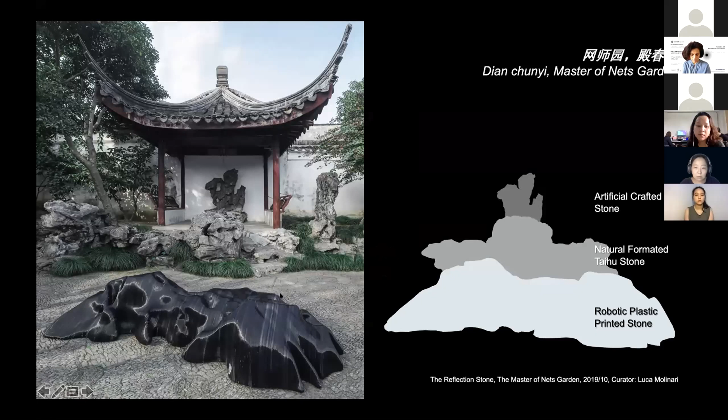I want to put forward several examples in about 2 minutes about what we have done in the past 2 years. This is the Chinese Garden new contemporary art. We position the new 3D plastic printing rockery in front of the natural format and the Taihu stone in the middle.

And an artificial craft stone from 100 years ago. So it's like a collage of different history and tradition scenarios, which presents new technology and also addresses itself into the tradition. So that is like a background.

I want to start the rethinking on humanism in the Anthropocene. And this is like a new human behavior—we can play with this kind of new rockery as street furniture, which engages into the visiting process.

In the last few years, we researched different pavilions focused on a bridge—every year we make a bridge. This is a 3D plastic printing bridge. The first year it was around 1,500 kilo, and we could stand like 5 people on this.

This is the second year. We invited 2 former chairs of MIT and the Pritzker Prize winner Wang Shu to come here with us for the opening of the pavilion. This is a 3D concrete welding, steel welding bridge.

It can stand like 7 people on it, and the weight of the bridge is around 800 kilo. So that is a higher performance compared to the past one.

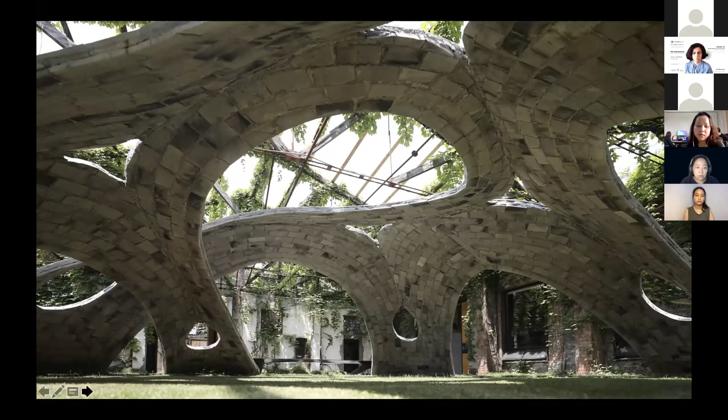Afterwards, this is Philippe Block and me standing on it, which has a very high structural performance. Based on this kind of formation, optimization, and fabrication process, we are embracing the tradition like a vault structure toward a bright future—it's structural performance-based robotic fabrication.

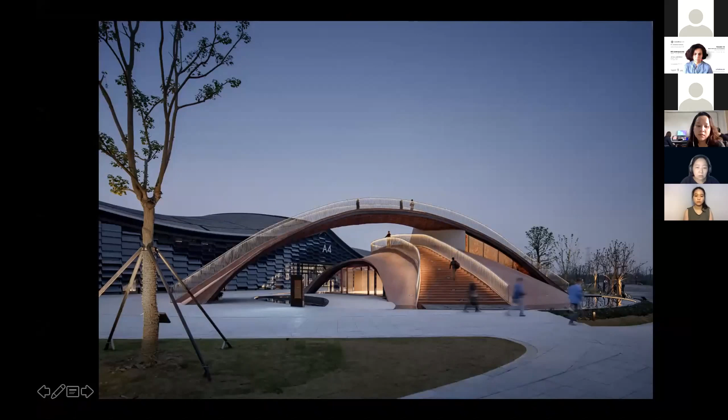Then after that project, last year, we constructed a project like this—45-meter span with only 3 layers of bricks—and also 3D printing scaffolding supporting the whole process, which was constructed in 1 month and a half, extremely efficient, based on this kind of process.

And this is another pivoting way, making the same kind of project with 3D plastic printing. We use environment-friendly material to print a new wall structure to support the certain weight of the building. Afterwards, you can see this is the whole process of a project we made in Wuzhen last year.

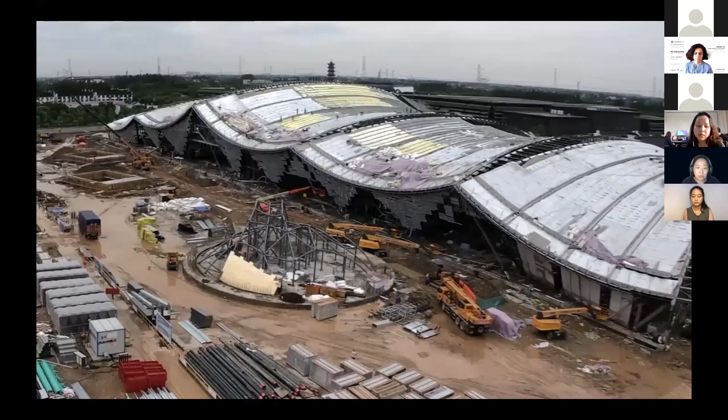I think the whole process is based on the digital construction field, which integrates different kinds of new technology in one project, including plastic welding, plastic printing, and brick masonry work, also with large span structures. So the process to integrate computation and digital fabrication makes a bright future for us.

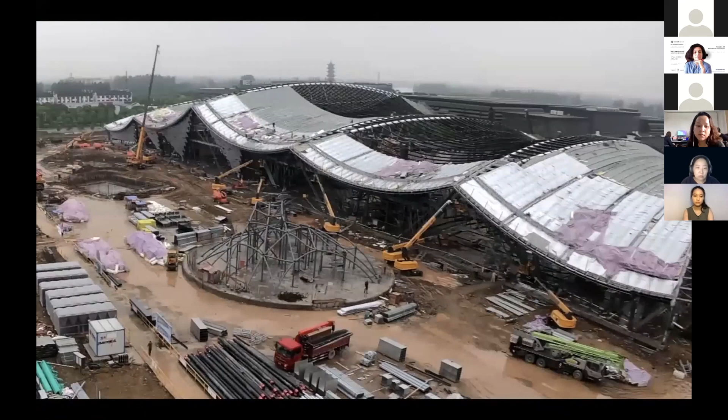To end this brief introduction, today based on the panelists we've subdivided the presentation into 3 topics. The first topic will be from material computation to digital fabrication. So firstly, I want to invite Jungwon Yoon. Could you briefly present what you have done in your paper to all of us, please?

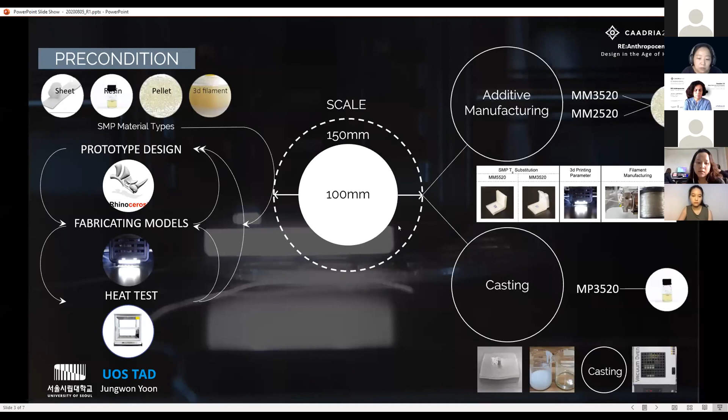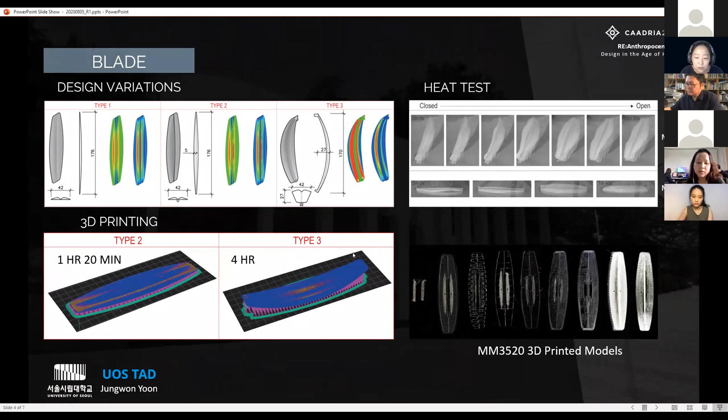For the blade prototype, different design variations were experimented for 3D printing and heat testing to examine the influence of curvature and form onto the printing quality, workload, and shape recovery. In 3D printing with the MM3520, many recalibration processes were taken to achieve the successful setting. In the end, MM3520 showed a much more prompt response to temperature and quicker shape changing.

For the swirl prototype, we conducted a series of trials for 3D printing with many errors and handling to achieve the final successful production, as shown in the picture. However, in scaling up the model size from 100 millimeters to 150 millimeters, several issues were discovered to tackle. Without resolving problems by human surveillance and support, it takes 10 hours to print the 150 millimeter model, which is not really desirable for rapid prototyping.

To compare the manufacturing efficiency, we conducted SMP resin casting experiments. However, the SMP resin models also showed more problems than 3D printing. Therefore, from experiments with two different manufacturing methods, it was demonstrated that 3D printing is superior to casting in terms of production time, required equipment, procedure, and consumed materials. This comparison informed us to revisit the system and design.

In consideration of the reversibility of the shape and complications in fabrication, the prototype was redesigned to have an SMP actuator with other flexible surface materials. The designed SMP actuators were simple and easy to 3D print. Throughout the whole process, from blade to swirl, from surface active to actuator system, the last prototype was the design which achieved the desired size and kinetic movements.

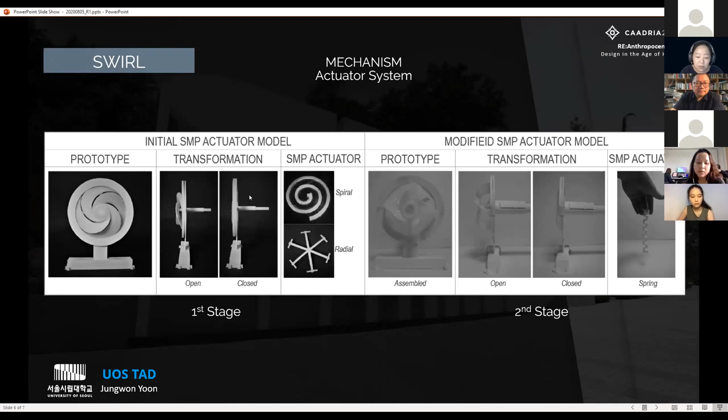From this study, we could review selection of fabrication methods rather than blindly pursuing 3D printing, in addition to verifying many challenges to overcome. To make the full...

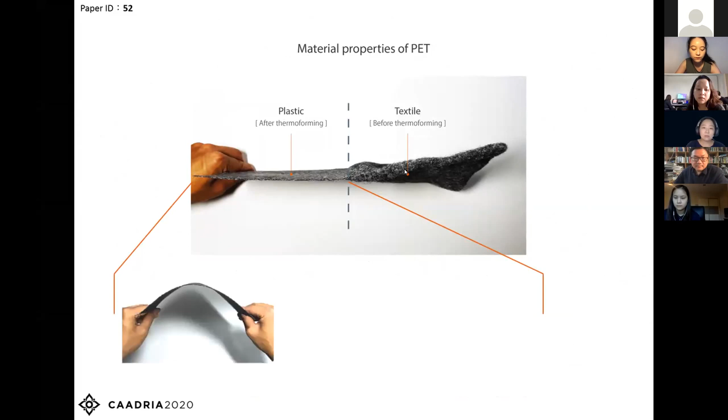...degrees Celsius as a controllable temperature range. The material reflects two opposite properties of plastic and textile through heat pressing. According to the change of thermoforming thickness, the range of plastic properties changes from elastic to hard, like a wood board.

There are two processes of fabrication: one is winding fabrication, the other is thermoforming fabrication. The winding pattern could make the units more flexible, and with temperature controlling, the PET material could be shaped.

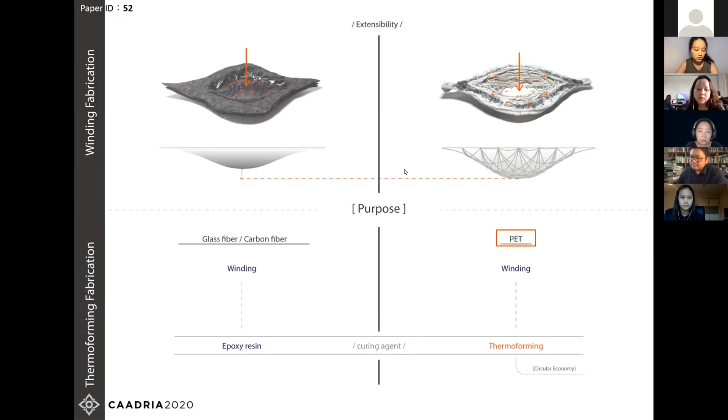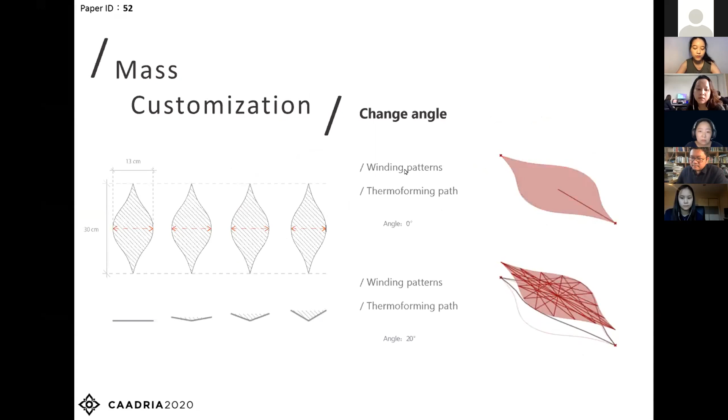The goal of the thesis is mass customization. For instance, it can change the angle to control the width of units, and the other approach works without a framework. With these two developments of each fabrication, I want to show you a video.

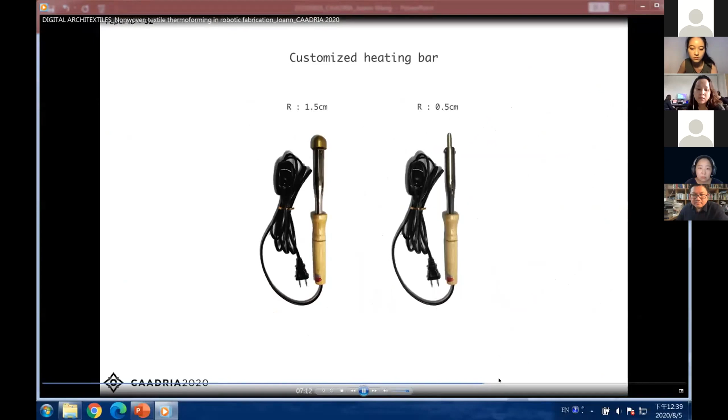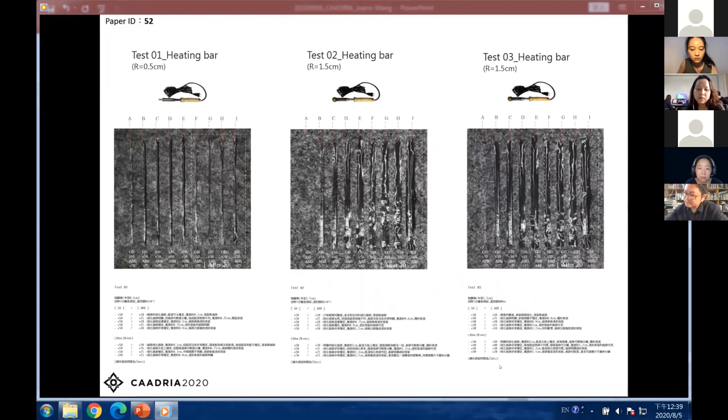A custom-made heating bar is used in the thermoforming process, which can control the temperature between two sets to choose from. In a preliminary heating path test, I collected relevant data such as time, moving speed, the contact area of the heating tool, and melting degree of the nonwoven fabric.

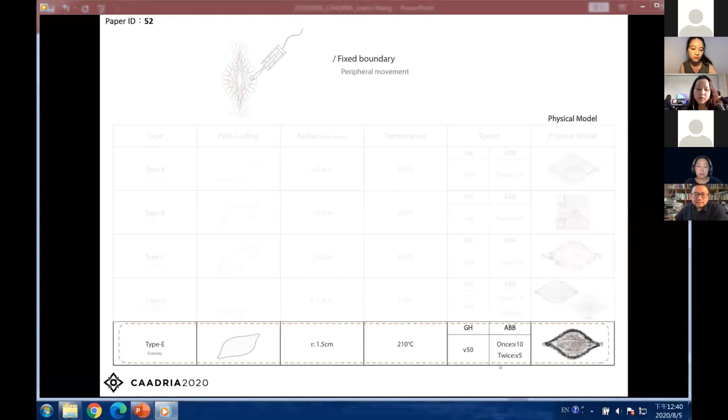Regarding the thermoforming coding, the first one is for the concave surface. In an effort to achieve the expected depth, more force is needed interior to respond to the material rebound, so the coding of the path is set up with a deeper parameter. The second one is for heating the boundary. In order to ensure the woven mesh and edge are smooth, it takes high temperature, repeated passes, and a slow speed to operate. This is the process of fabrication.

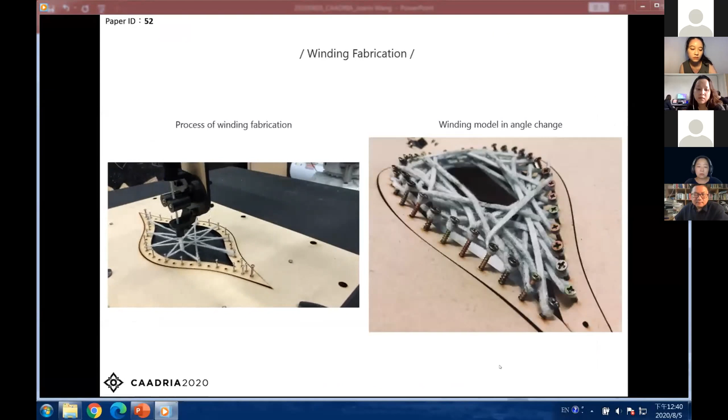And this is our successful process of winding fiber and the product of the angle winding. After the final winding products are performed, different combinations of winding patterns will produce different heating pressing effects.

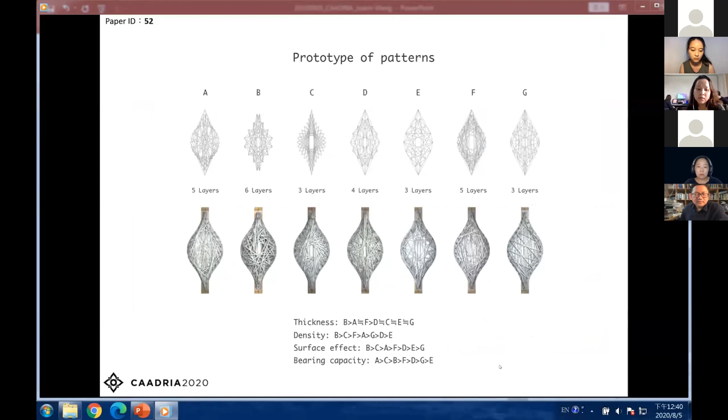For the enhancement of product stability, it takes overlapping winding patterns with different thermoforming types. After analyzing the individual strands, it will be assigned to different parts of the mockup by the stability of the structure.

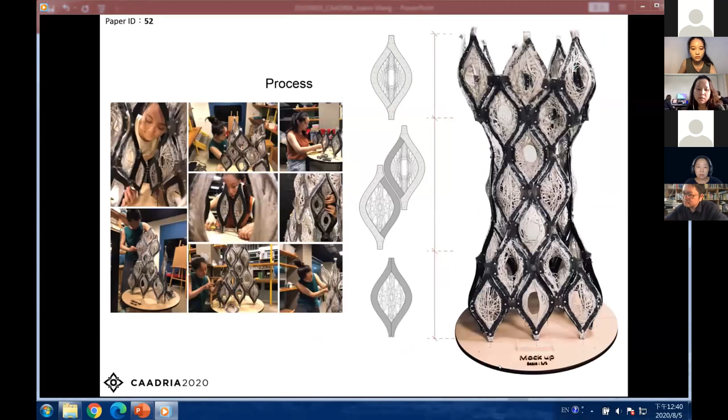The bottom of the mockup takes a hard PET board with PET non-woven textiles applied by the robotic arm to stabilize the entire structure.

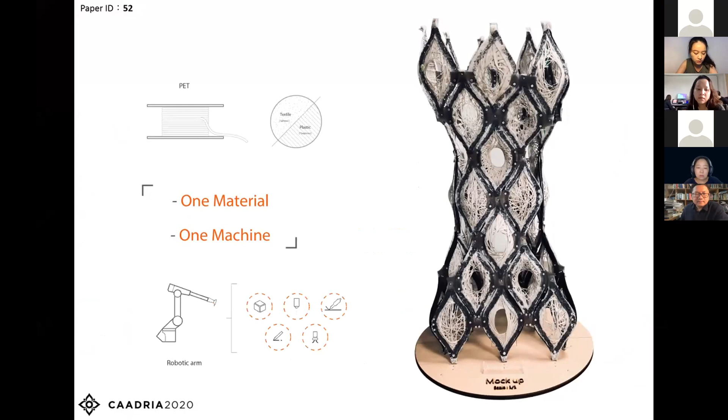Based on the concept of the circular economy, the thesis is conducted towards the goal of one material, one machine. It means using a material but attaining more properties and performing multiple fabrication processes by using one robotic arm. And this is my thesis.

Thank you. Thank you, John.

I think it's a very interesting topic based on the thermoforming and filament winding process, based on one material and one heating instrument. Material intelligence is really interesting to make a great performance to generate different kinds of form. So I think we can have further discussion afterwards after the presentation.

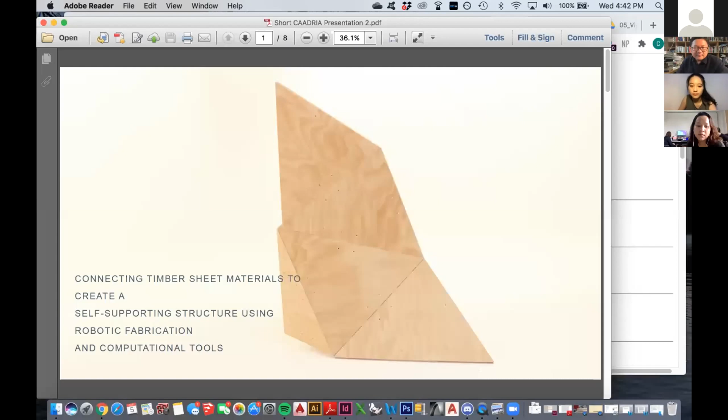Hi, my name is Celine and I'm from Victoria University of Wellington in New Zealand. So I'm just going to do a quick summary of my research. This research focuses on developing a workflow to create a self-supporting structure using robotic fabrication and computational tools.

Parametric software combined with the robotic arm was explored to find how it can create timber connections to connect sheet materials at different angles. This method was utilized to repurpose the concept of sheet materials towards a complex structure, which adopted the idea of mass customization over mass production.

Using this technology saves a lot of time compared to when connections are created manually in the past using woodworking techniques. Japanese timber connections were a strong influence for this research due to its prolonged lifespan and sustainable advantages.

These connections did not require any metal fixings, making it environmentally friendly, so this is why they wanted to incorporate the technology we have today to use it.

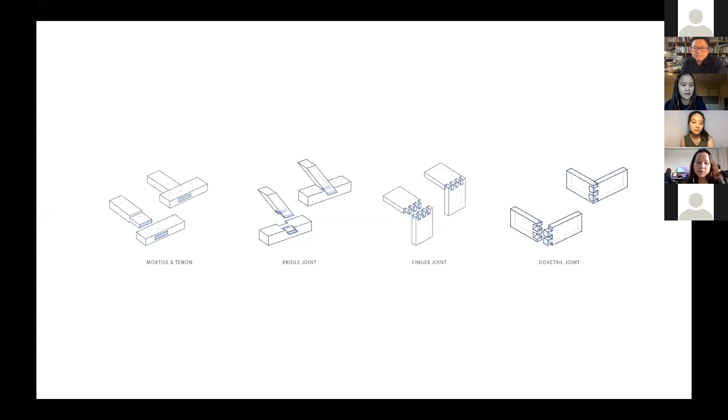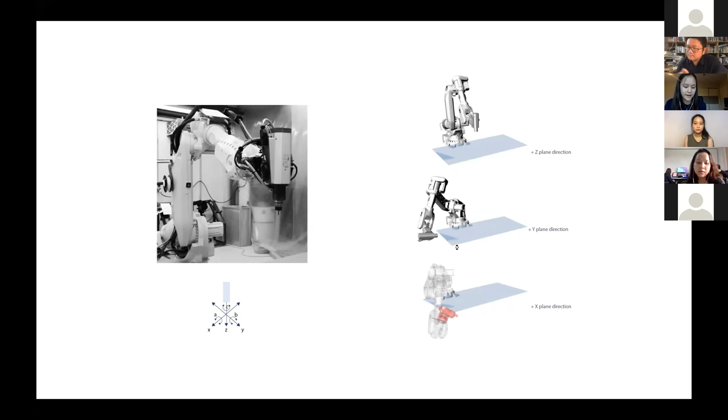This research explores fabrication with the 6-axis industrial robotic arm. The use of a digitally controlled fabrication process broadens the boundaries, which offers the opportunity to create complex designs and inform new construction techniques. So the ability of the robotic arm to cut at different angles means the plywood can be joined at angles to create designs that aren't just a box shape.

Instead of a limited choice of possible construction options, every surface can be customized based on design parameters.

In this research, 5 sheets of 25mm thick plywood were joined together using a mortise and tenon joinery technique, and it was able to hold itself together without the need of any glue or screws.

Yeah, so that's just the overall structure that I made. Thank you. Great, that's the end.

Okay, thank you, Celine. It's great research on the timber panel, based on a very precise, accurate fabrication process to generate different kinds of geometry. I think there's a lot of potential for future work based on this system.

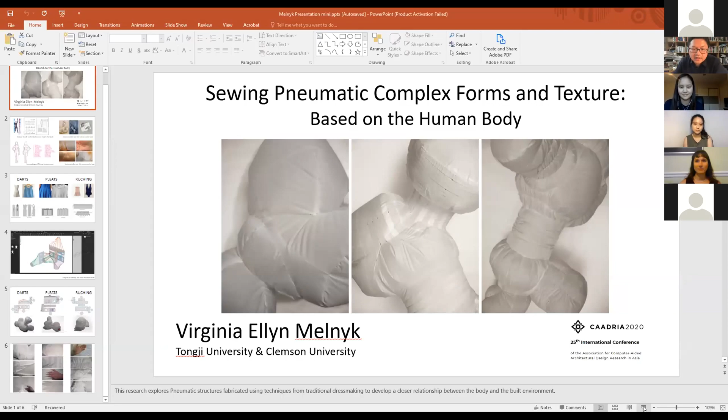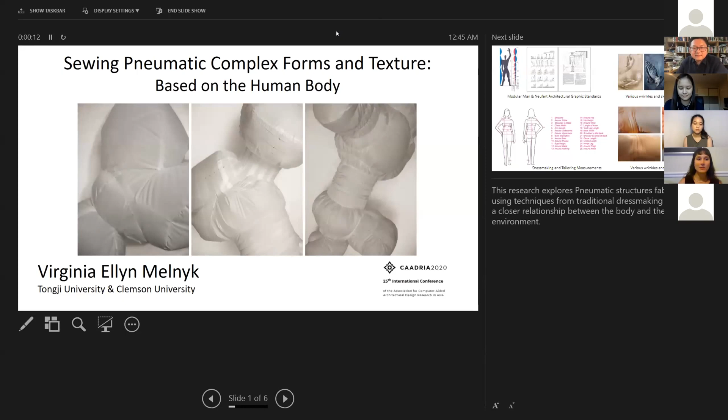Hi, so Philip already introduced me, and I'm going to really quickly present my project on sewing pneumatic forms. I was really inspired by the body, and partially the call for this conference really dealt with the human element in architecture. We look at the body all the time when we are relating to proportions, like the Modulor Man or Neufert's graphic standards, but the body is also really integral when we think of fashion design.

Measurements of the body for fashion design are slightly different than those we consider in architecture. And in art, the body is really defined a lot by the textures and wrinkles of our skin. Artists have always been fascinated with hands and the intricate details within them.

So I was really taking this project to combine digital technology and the traditional craft of dressmaking. I looked at different sewing techniques that have been used for centuries in manufacturing dresses, and took these techniques to help design in a 3D program made for fashion design.

This is Clo 3D, where you can take panels of fabric and assign stitching patterns and types of stitches. You can assign typical fabric and material qualities, then add gravity so it drapes like it would over your body. But in this case, I also added inflation physics analysis.

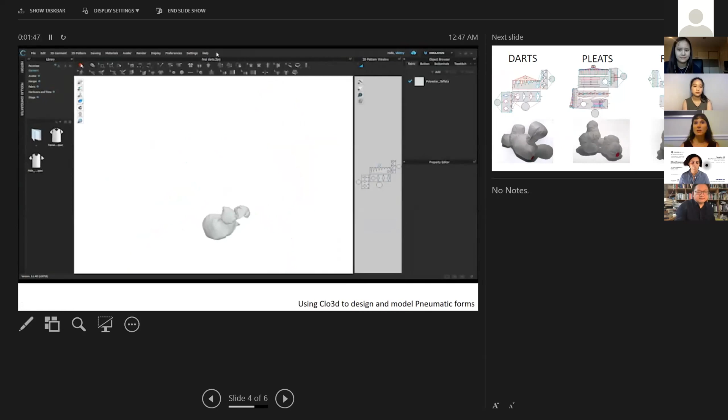So it would start to inflate like a pneumatic form, which is the desired shape for an architectural structure. The program also allows you to manipulate, push and pull it, the same way you might be concerned about how a shirt or dress might need to push and pull.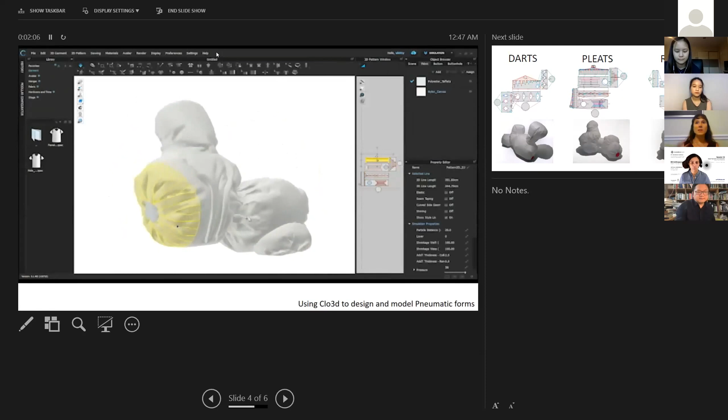But I was thinking of this in a more architectural sense, of how we might touch or play with different walls, spaces, or furniture within our architectural environment. Lastly, it also gives simulation effects of where moments of stress and strain are going to be, based on the stitching and how the fabric is pulled. So it's really helpful in this design process.

Here you can see my resulting patterns of three different designs, each focused on an individual sewing technique from dressmaking. Resultantly they became these kind of blobs, but I was much more interested in the textures they created and how the human body can interact and engage with these textures, as we're looking at this age of the human and how people today are actually very socially isolated.

The artist Lucy McRae, her work was really inspiring to me in the sense that she's looking at the fact that we have a sort of touch crisis due to everybody being addicted to their phones and computer screens. We no longer hug and embrace one another, and she creates work that simulates hugs and gives comfort to people, and there's a lot of science behind why this is beneficial. So I was hoping through this exploration to take advantage of those experiences in our architectural environment.

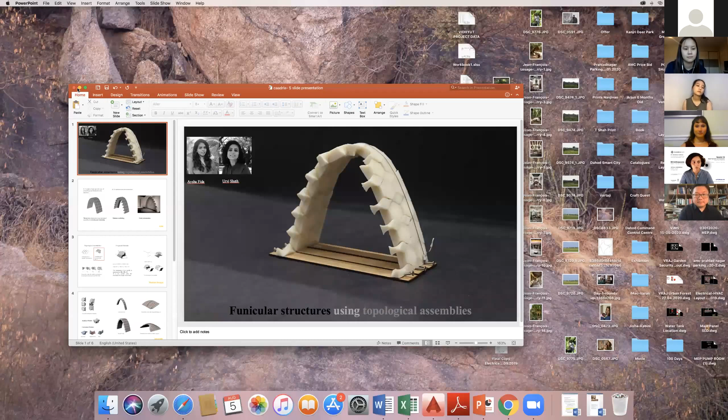Can you view my screen? We can see you, but not your screen. Just a second. And now? Yes, here we go. All right.

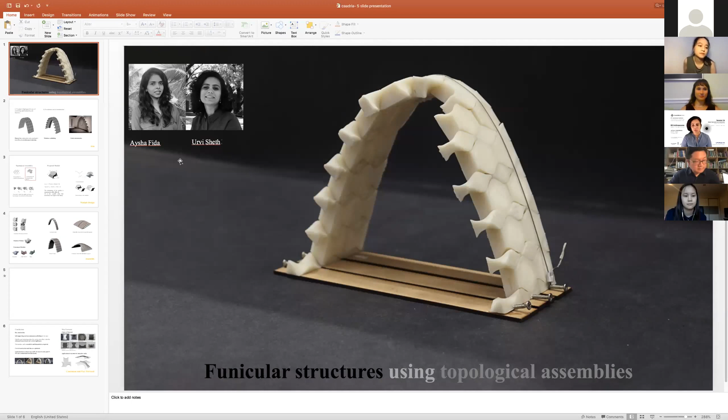So this is research on funicular structures using topological assemblies, done by Aysha Fida, who is in the audience room right now. That's why I put the picture again. It's a joint work. So what we attempted here is, the aim is to achieve ease of assembly and dismantling of funicular structures using topological assemblies.

And what we were trying to achieve, more than what's already being done in these lines with this kind of robotic stone cutting construction by the lab, the Italian Morpho Structure Lab, is to limit the customization.

These are the two goals, because we sit in a context where we're really refrained from using robots as a cutting-edge technology in real-time constructions on site, because it's unaffordable. It is to minimize the cost and minimize the scaffolding, so that we can actually take these kinds of constructions on site in today's time.

So what we did is, amongst the topological assemblies, which are force-locked elements in a given plane or in a 2-dimensional plane, is the osteomorphic blocks. A block is designed based on the sine-cosine trigonometric function, and when we flip it, it locks.

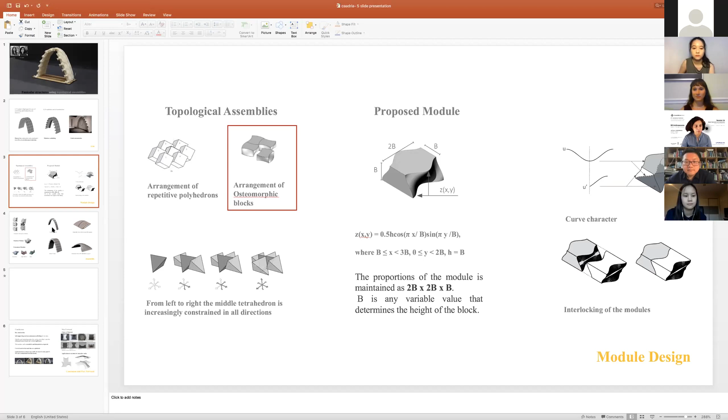Further, when we apply it into a curved geometry, there will be a level of customization required. If it was a plane, it was the same block which can be flipped and locked. But when it is curved, there are three modules: angle spacers—one at the base—and the keystone. These three elements change based on the geometry, the rise and span of the structure, so it always customizes.

Once again, except for the catenary arch and barrel vault, where we are almost able to achieve 68% of the customization limited—that means we are really able to balance between the standard and customized module.

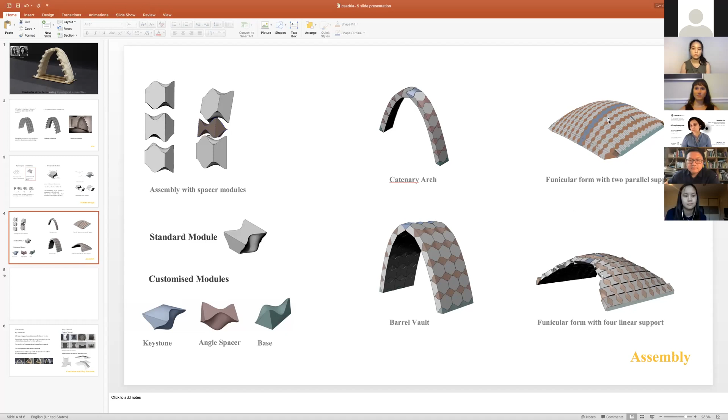Structures like this, where we have two linear spans and let the form take shape as a funicular structure, or with four-side linear supports, the level of customization is of course going to increase.

So how we visualize the construction logic: two methods of construction were visualized, one with minimum formwork and the other without formwork. For a symmetrical form having a square plan and four linear supports, the assembly begins from the outer edge having two parallel supports for the first arch.

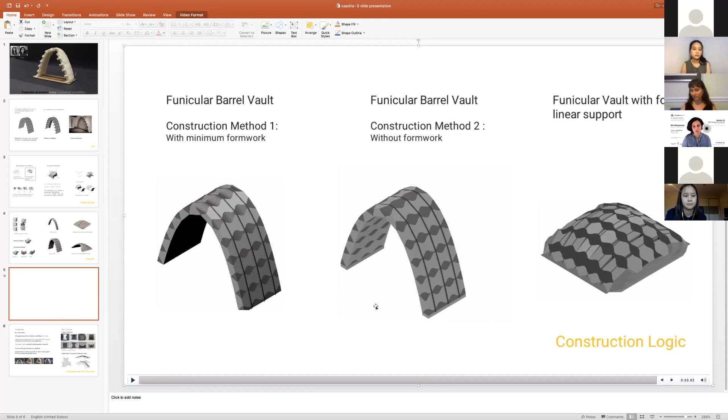With these construction options, if we start with minimum formwork on site with alternate blocks interlocking, the next rows can be assembled without any formwork. Before we start the next row, we have to secure the first row with the tension cable tightened fully and secured. This also helps in performing against lateral loads. This way we make the system robust in interlocking not just in one direction, but in all directions.

So finally, what we are achieving so far is a dry construction which is self-supporting using minimum scaffolding. With the extrados post-tensioning system, it makes it withstand lateral loads and vertical upliftments. The modules are assembled and disassembled as required.

That means we can transport them as and when required to whichever site, and it can be called temporary or emergency shelters. The cost of construction and time are optimized because if we are not having all customized blocks, it questions whether we are going for highly sophisticated 100% customization, or a balanced system which is affordable.

Finally, the customization is reduced to 68% for barrel vaults and 45 to 55% for symmetrical funicular forms. Now, what we are going to work on further is the material of these blocks in real time, test them, and see how much we can really push this for free-form geometry.

Thank you, Philip. Thank you.

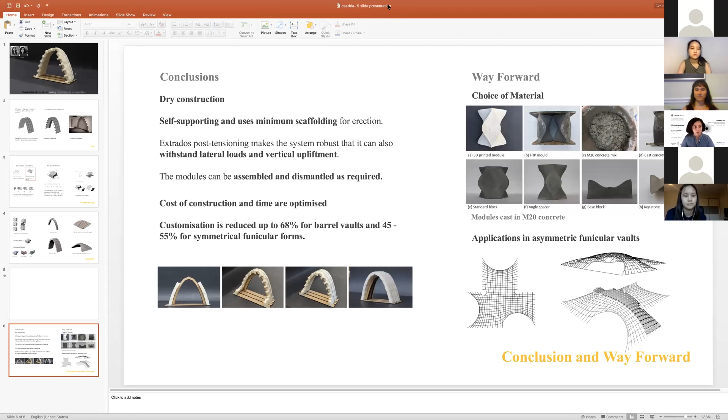It's great research. I think what you're doing focuses on new formation tools, different kinds of vaults like Rhino Vault, different kinds of formation, based on modular geometry form-finding fabrication process. I think the modular definition will give a great opportunity in the fabrication process, which is totally based on structure performance-based tools. I think it's really meaningful, especially working on asymmetrical funicular vaults, which is a super high performance structure.

And we also make a lot of research on that. So I find your research really interesting, and it goes through high efficient structure systems which have great potential in the future. So thank you so much.

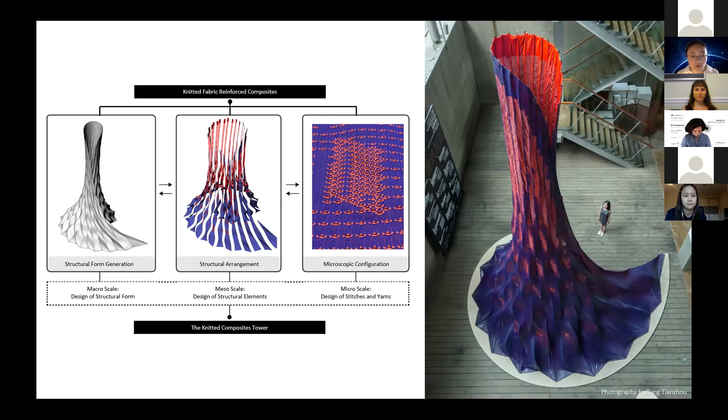With this workflow, we developed a structure form through comparative study, which can maximize both the tower's local and global stability, while the material thickness is only 2 to 3 millimeters.

In this workflow, we are able to inform the distribution of structural elements such as reinforcements and holes according to the structure information through topological optimization and finite element analysis to optimize the force flow.

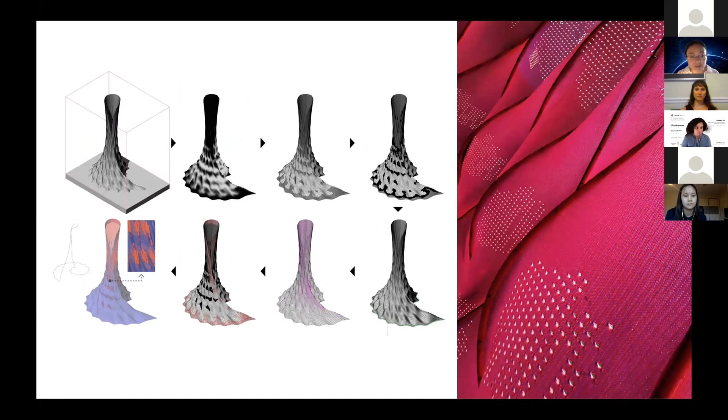While designing the structural elements of knitted preforms and steel plates, we also consider the logic of knitting and fabric connections so as to make them easy for fabrication and assembly.

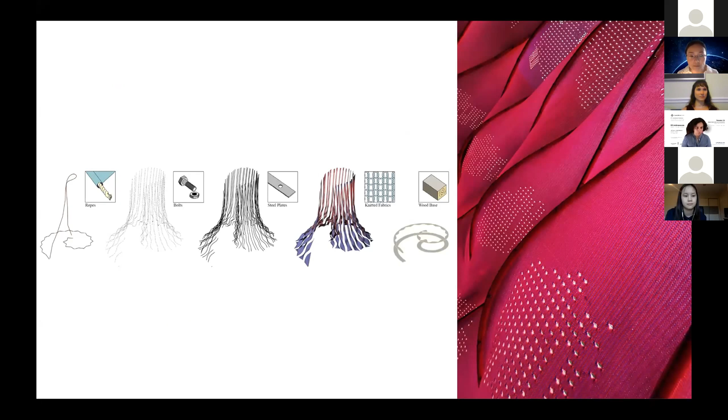It is worth mentioning that during this workflow, we developed a program that can automatically convert 3D geometries as well as structural design information into a digital model of knit stitches and generate G-codes for the CNC knitting machines. This program established a smooth connection between knitting, CNC knitting, and architecture design.

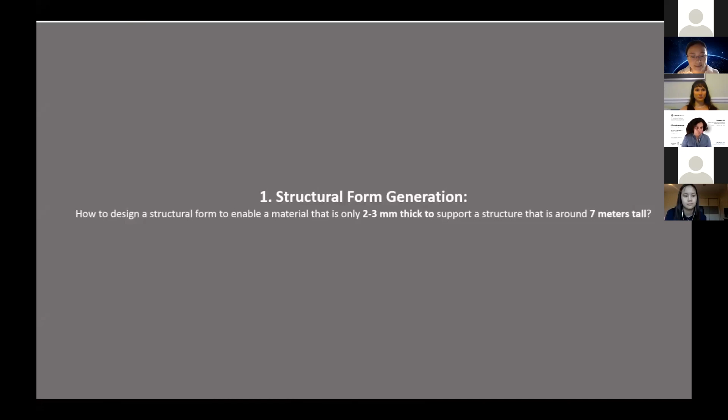Based on this workflow, we finally achieved a 7.2 meter, 260 kilogram self-support, lightweight, stable tower. The knitted composite tower uses a minimum mass of material to achieve the effective structure and minimizes material wastage during the whole process.

This knitted composite tower verifies our structural performance-based computational workflow based on advanced knitting and demonstrates the design potential of knitted fabric reinforced composites for super lightweight and high performance architectural applications.

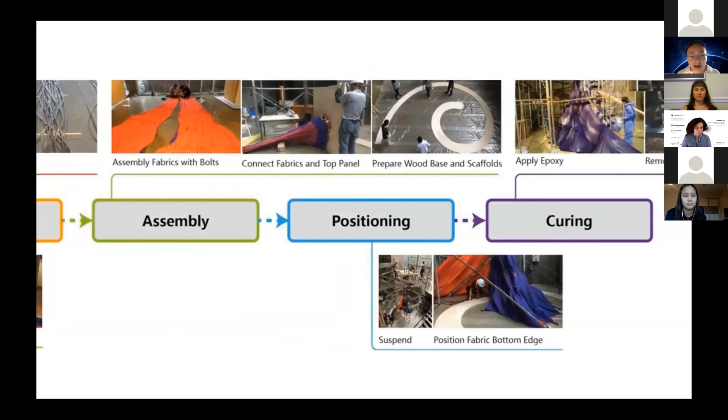For future research, we will further improve the workflow to reduce the problem of wrinkles, and we will also improve the knitting code generation program to make it fast and robust. And that's all about my presentation, thank you.

Thank you, Yige. It's a project we achieved last year. I think it goes through the super high and super thin, ultra thin knitting project, giving a super high performance-based formation. I think this methodology, the whole working flow, is based not only on material intelligence research, but also we integrate structure performance-based design and knitting fabrication technology. So we can make maybe further discussion later.

So next, we have 2 presenters who are not here, Xiaokai and Liu Chenjun. I will invite my... are you here, Xiaokai? Yeah, please.

Hello everyone, my name is Xiaokai. Here we take a pavilion as an example to discuss the design and fabrication methods of aggregation based on voxels. Voxels are also known as 3-dimensional pixels, and their basic shape is a cube. It's a way of representing space in numbers.

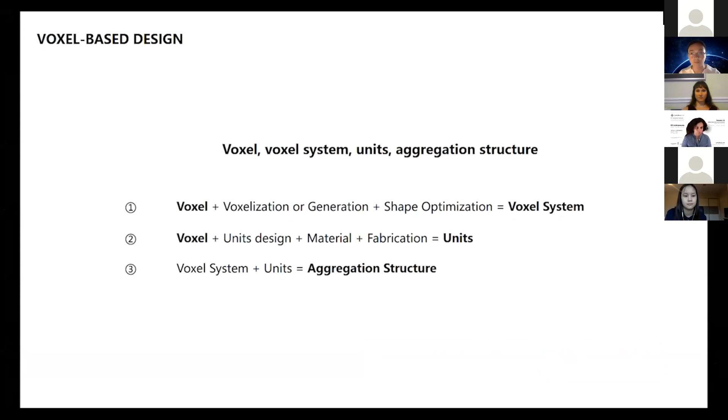In order to increase the complexity of the aggregation structure, we decided on voxels of 6 different sizes. The bigger 3 will be the main parts of the voxel system. The smaller ones are used as incidental parts of the voxel system to reduce self-weight and increase the structural strength.

After defining the shape of the voxel, we think about how to design the aggregation unit within the voxel boundary. We take into consideration the materials, the interface of connection design, and the way of fabrication. In this study, the units are connected by surface-to-surface connection, which is a stable way.

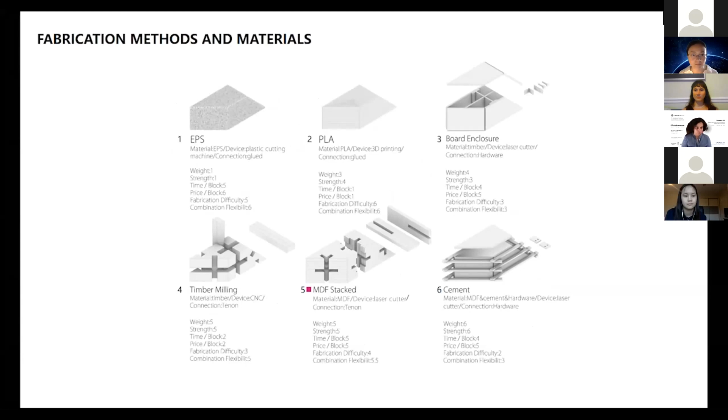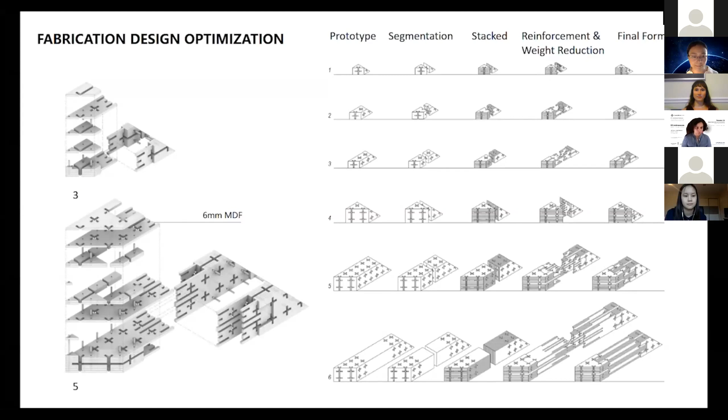This diagram shows the process of 6 units from initial design to fabrication design. The next step is to take a further study on how to design a voxel system. There are 2 ways. One is to transform the existing form into a form composed of voxels through the top-down voxelization method.

The second way is the main point of the research. It is a bottom-up design process. In the design of the pavilion, forms of force and the support points are defined.

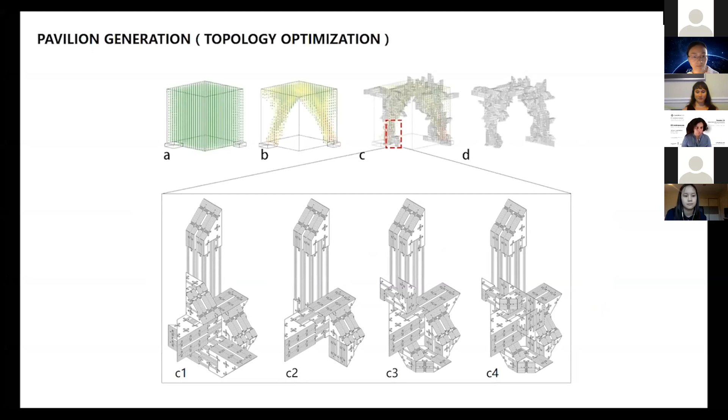The reasonable field is found in the space, as shown in figure B. The new field controls the boundaries of the aggregation generation. After completing the aggregation of the 3 larger size units, the small size units are used to replace the larger units that are not the main part, or to add to the vulnerable part of the structure.

This study provides a general design method of complex aggregation structures. The change of voxel shapes makes the aggregation more diverse.

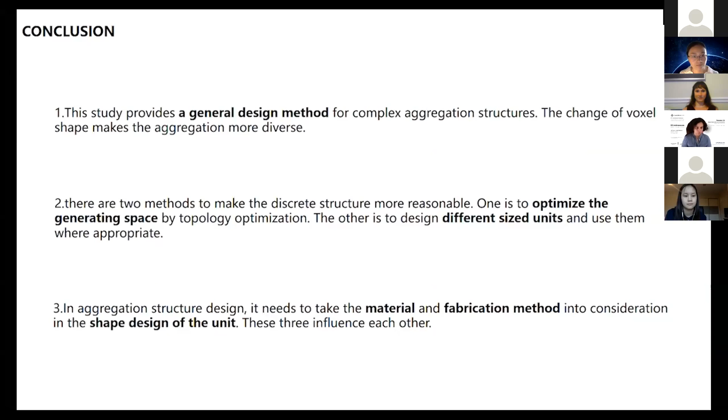In this paper, a method of combining performance-driven optimization with parametric design is proposed. The iterative evolution is under the control of performance loop and fabrication loop, which makes all the data provided by parametric design in a practical project available for exploring structural analysis and digital prefabrication.

The practical project is located at the Fujian Children's Hospital in China. In the process of project evolution, a prototype is controlled by 2 factors: structural performance and prefabricated construction, by setting 2 conditional optimization statements in the original shape design programming.

In the loop of fabrication driven design, shown on screen, the data stream flows from point cloud to the final layer data through 3 self-programmed script plugins, whose functions are linear selection, constraint, adaptation, and delivering layered construction data.

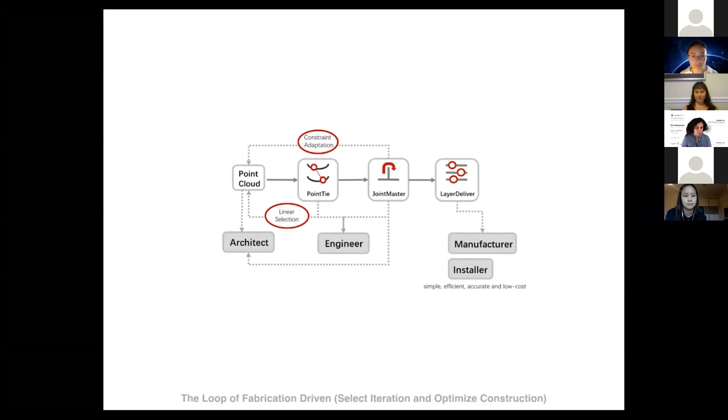In the loop of performance driven design, the data stream flows from line data to the final component data through a grasshopper plugin, whose function is statement iteration, and dynamic evolution.

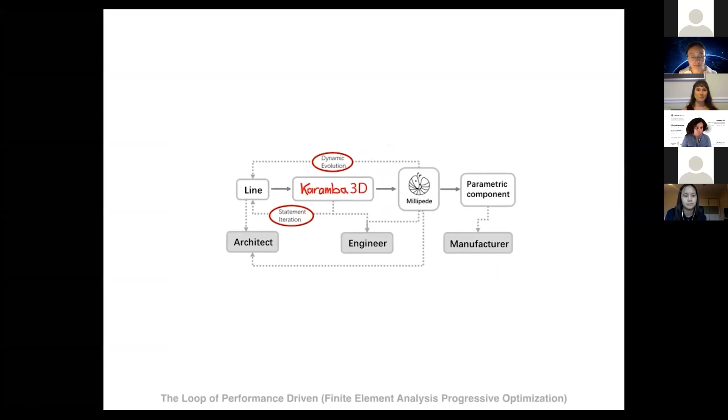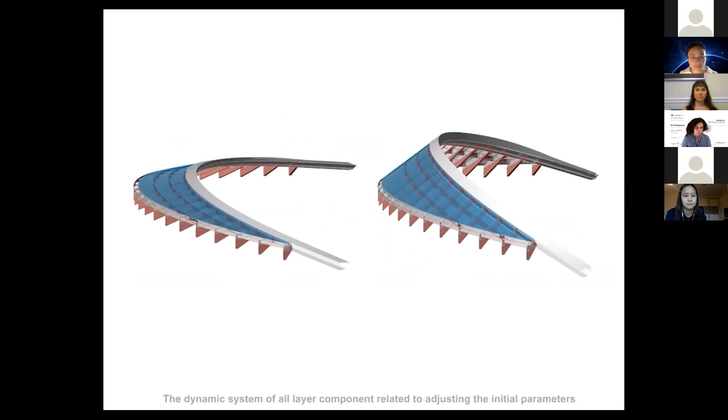After the previous stage of design, selection, and performance optimization, the whole curve steel frame gradually becomes a multi-level frame system, customized and codified under the parametric form. All steps of the project before the real prefabrication production can affect interactively and change in linkage, which provides efficiency

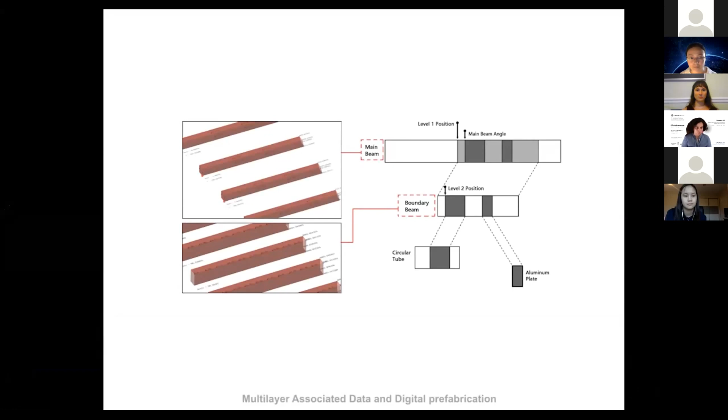and accuracy guarantee for project coordination and adjustments. The basic geometry is used to generate systems such as film, aluminum plate, and glass, creating a group of shape types linked under the guidance of the main system steel frame data. During the stage of steel prefabrication, the construction component is shaped by a series of CNC machine systems.

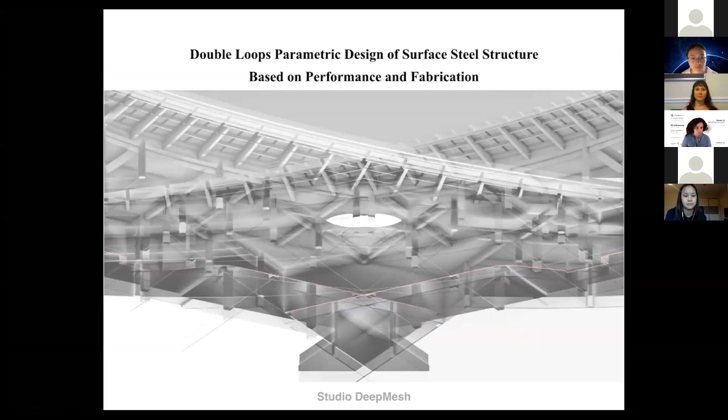In the whole process, the entire building is designed, optimized, and built using a digital system of 0 and 1, representing binary signal, and the operational monitoring of the building is closely related to the initial 0 and 1 in the future. Thank you.

Thank you for the two presentations. I think Xiaokai and Liu Chenjun is very interesting, going to two different directions of digital fabrication based on structural performance. Xiaokai goes to the voxelization, a discrete, totally discrete system, and the voxel modular gave simulation to different kinds of geometry surface, while Liu Chenjun goes to a different direction, making this kind of 3D bending in steel structure, which goes to this kind of continuous simulation of different kinds of curves and makes the accuracy process for the fabrication work. So that's a very interesting two directions.

So we can make further discussion in the final panel discussion. And I would like to invite you to go to topic 3, which focuses on the topic of workflows of computational design and digital fabrication. So firstly, I would like to invite Xiao Zhifu. Would you like to present right now?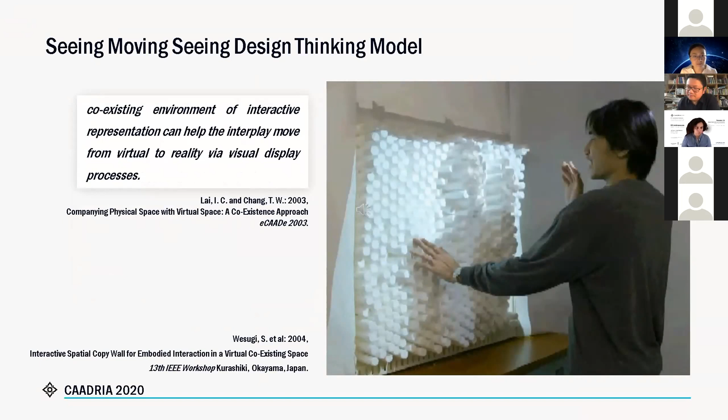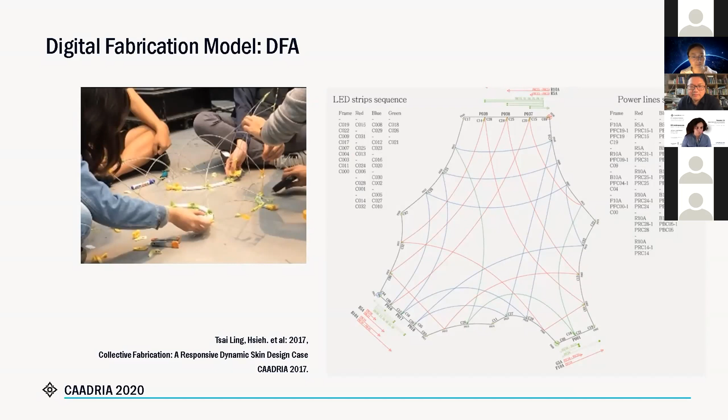To share this new approach to digital fabrication workflow with you. We regard digital fabrication workflow as a seeing, moving, seeing design thinking model, as Schön and Wiggins had indicated in 1992. Furthermore, Wesugi also confirmed Schön and Wiggins' hypothesis and proposed the ISCW system so that remote participants can interact with each other. In 2017, Ling Hsieh improved this seeing, moving, seeing model as an automatic drawing generation system, DFA, to help fabrication teams assemble complex components. We then improved ISCW and DFA with an interactive coexisting system to aid amateur team crews manage the fabrication process between virtual database and physical fabrication environment.

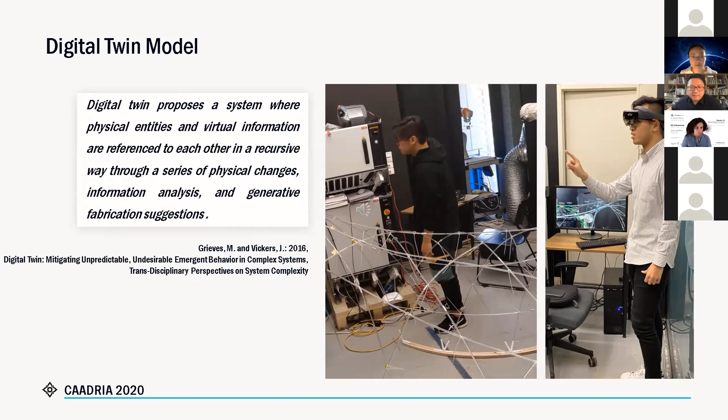We practice a coexisting digital twin concept to enhance a recursively, automatically, rapidly exchanging process. We build a digital twin system where users can wear a mixed reality device as a visual sensor and constantly update and send physical changes onto the cloud database. We implement this mixed reality interactive data flow as a coexisting fabrication system and call it CoFab.

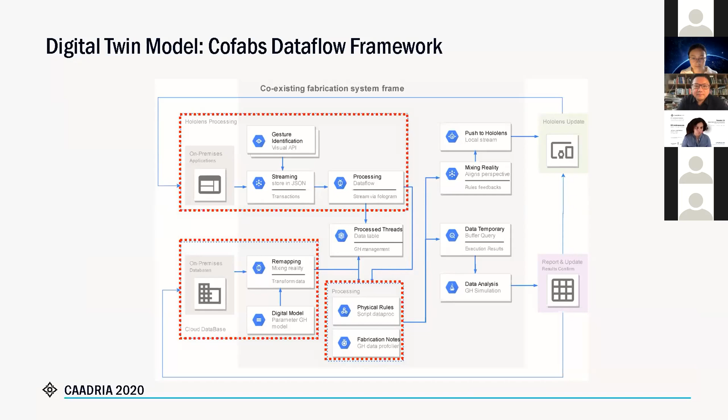CoFab's data flow is composed of 3 threads. The first is the stage of sensing physical prototype changes. Another is the stage on premises virtual cloud database. The third is the processing stage, which deals with the gesture in the digital model rendering.

To figure out how to use this interactive interface to aid users in making decisions, first we upload the digital twin model to the database and render a mixed reality environment in HoloLens. We render each digital node via 4 understandable color modes to help the team leader recognize the working progress.

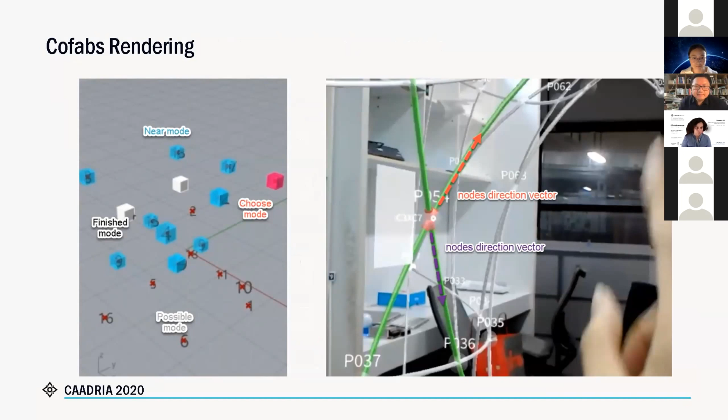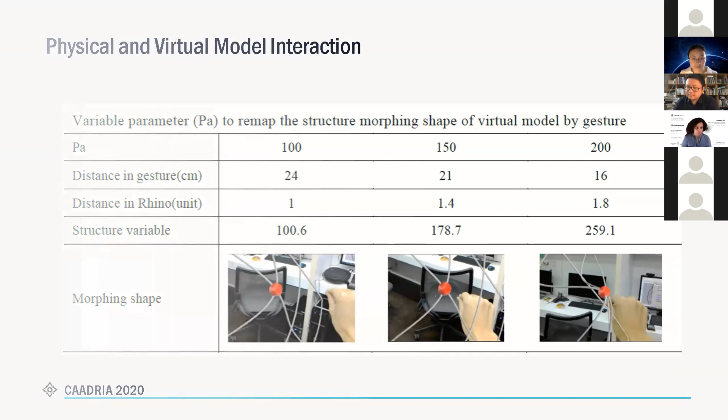Great, thanks a lot Chi-Fu. I think it's great research based on digital twin methodology, and especially focuses on the node vector, which gives very strong material intelligence to generate different kinds of form. So thank you so much.

And next, I would like to invite Niels Martin Larsen. Is Niels here? Yes, I'm here. You're from Denmark, right? Yes, that's correct. I'll try to share my screen. It's really early morning. Yeah, it's really early here.

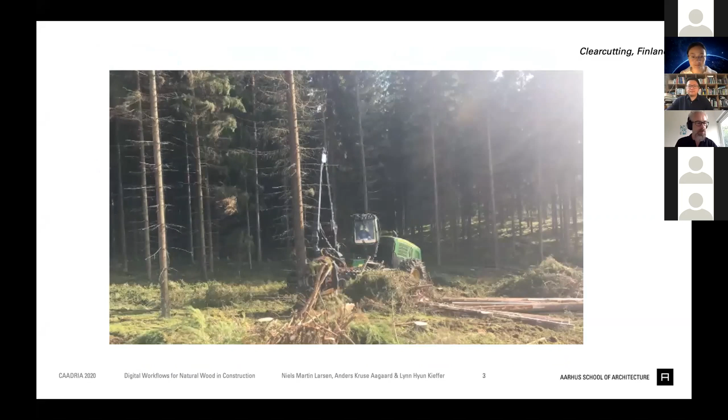So to be able to position wood truly as the sustainable resource for buildings, the current industry would have to change. And so we have been seeking to rethink the way we use timber in construction and look at the possibility of using crooked trees to allow for better use of resources and possibly new types of forests with increased biodiversity.

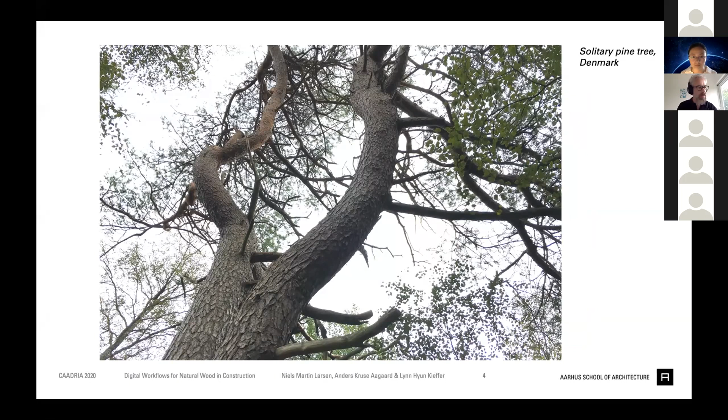So our concept is to match natural saw logs, which are crooked, with geometries and extract machining information so that natural shapes of the logs can be used in different construction types.

So the method consists of a series of steps. The first step is to establish a database of saw logs. Each saw log is scanned and analyzed into a NURBS representation, which is saved with information about location, quality, species, and dimensions. An overall design solution is defined, and here we see a lamella roof structure, which we're working with at the moment.

And then customized scripts - we have been developing scripts that distribute the material in the structure. I'll get back to that shortly. And of course, toolpaths for the robotic fabrication of each member are generated, and we use motion capture technology for positioning the logs during fabrication.

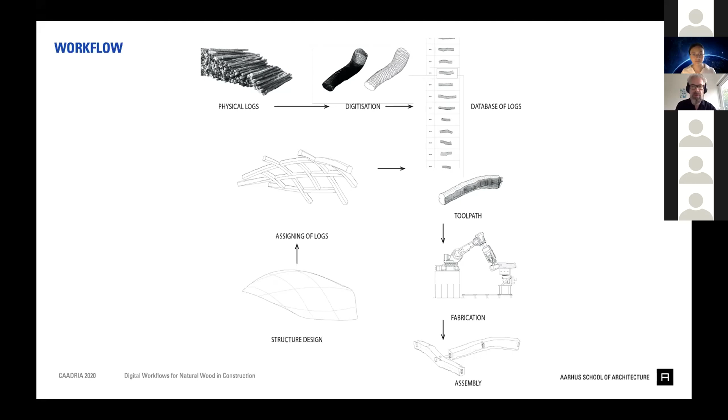So a little bit more into the data handling. The point cloud from the scanning of the saw log is translated into rationalized geometry. So the main task is actually to define a center curve, since this is used for the selection and placement of the logs, also tool path generation and visual representation.

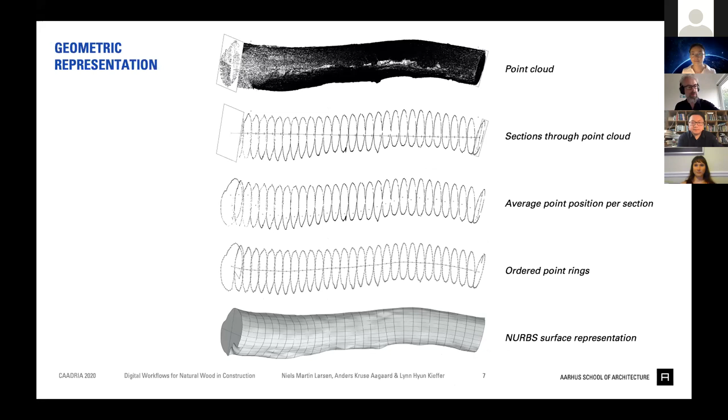And then the center curve plays an important role in generating the NURBS surface as well. So the system will go through each member of the structure and compare the curve segment with the center curves of the logs in the database and find the best match. So the log with the smallest deviation from the center curve is selected.

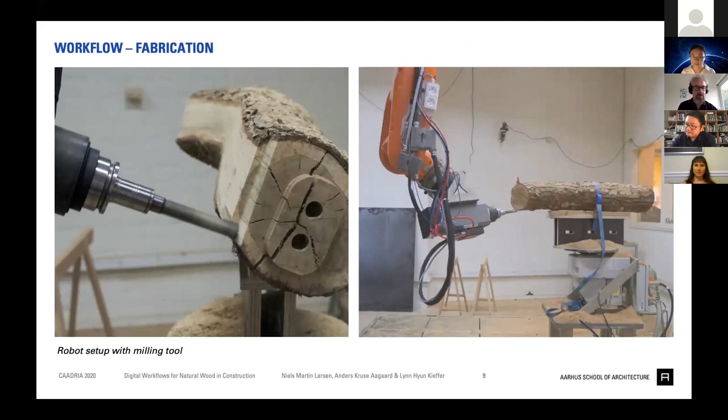We've been testing different types of robotic machining, and here, as you see, we are using milling at the moment. We also experimented with bandsaw, which we might come back to.

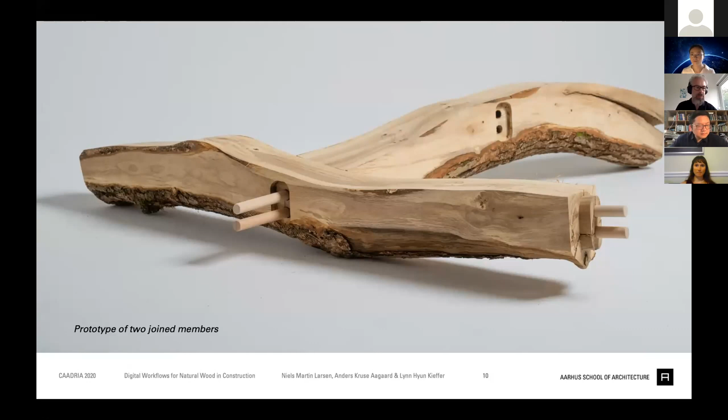And here you see one of our latest prototypes. We've been testing the design of the joints and the transition between the components, which we try to make as smooth as possible, of course. And here in the fall, we will actually produce a small test building at an open-air museum with this fabrication method. Thank you.

I think it's a great presentation to end this session, because I really like what you're doing, which not only integrates machine intelligence and artificial intelligence into the design process, but at the same time, you can still see the humanity in your design as well. I think these kinds of natural logs give strong materiality, which helps us imagine how to make full use of environmentally friendly material like logs and timber, and how to make full use of them in different kinds of forms. That's really a smart design process based on fabrication technology.